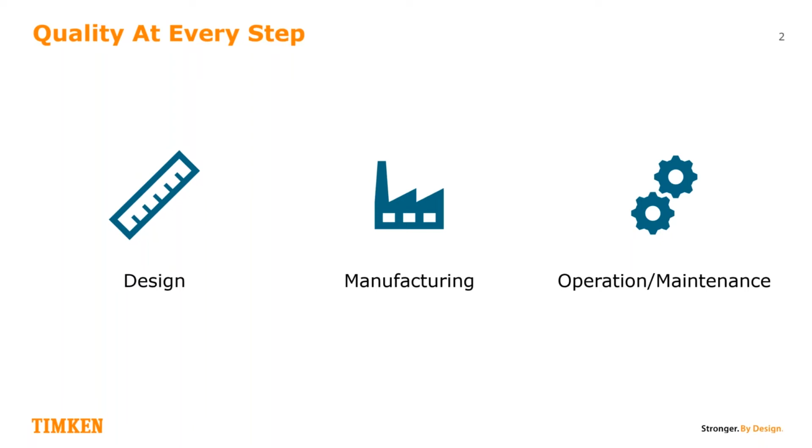Basically, gearboxes are designed to serve a function, and the ability of every component within the gearbox to perform its function is closely related to the lubrication that is provided to that gearbox. Frankly, a lot of the failure modes that we see are related back to the lubrication and issues with that lubrication.

Once we have issues with the oil and how it's provided and how it's able to cool and lubricate its components, if there's a degradation in that performance, that's when we actually have bearing and gear failures. So when we talk about the most common component failures, most of them have to do with lubricant, a lack of lubricant, a lack of flow, contamination, or somehow a degraded condition or incorrect lubricant.

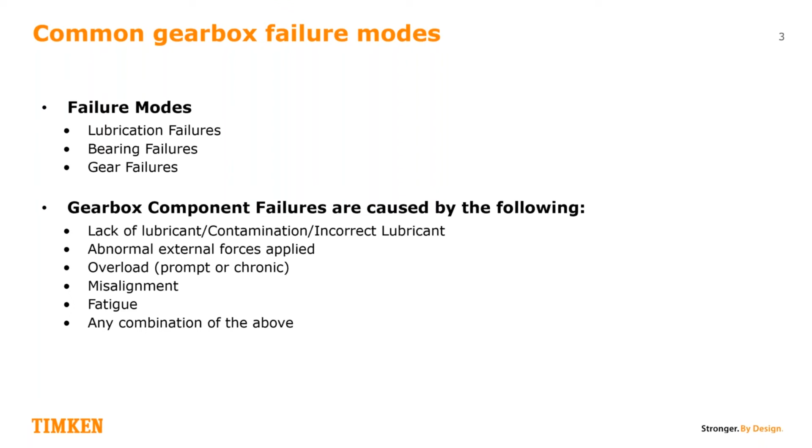Other factors that lead to gearbox failures are when we have abnormal or unanticipated forces applied to our gearbox. Also, you can see there are overloads, misalignments, fatigue failures, or combinations of the above. Now, there's a few things that we typically need to do before we go out and formally evaluate a gearbox. One thing is you need to know a little bit about what you're looking at.

One, understand the role that gearbox is playing, the service it provides to your process or application. We need to understand the speed requirement of the driven load and the speed of the prime mover, and how this gearbox is arranged, all its components, to translate the efficient operating speed of the prime mover down to or up to the efficient operating speed and power requirement of the driven load.

Another thing we need to do is look at the history of this gearbox. If it's a unit that's been in service for some period of time, we need to spend time evaluating previous evaluations and reports, and understand the maintenance that has occurred to the gearbox since it was last evaluated.

Oftentimes in these modern days, with changing requirements within our plants, we also have operational changes that affect our gearboxes, and we need to understand how changes like that may have affected our gearbox.

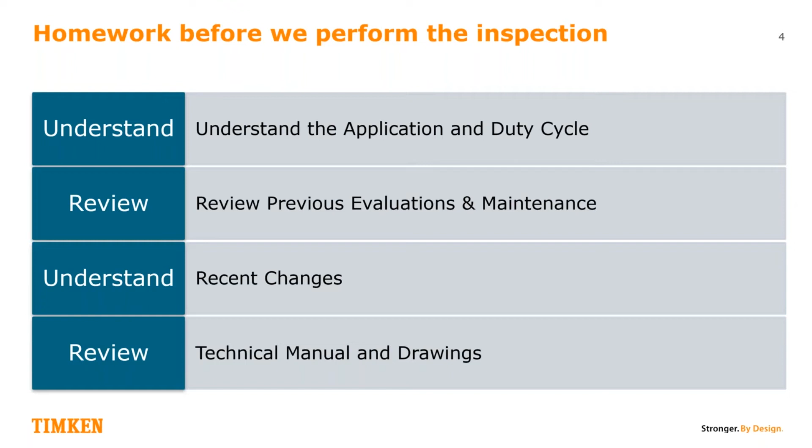There's a few concepts I like to keep in mind. I'm a big advocate for gearboxes. I've got the luxury of being motivated by technical correctness, and I have a fairly minimal concentration on the commercial aspects of the gear industry when I'm on site. I'm an advocate for the gearbox itself. You know how the Lorax speaks for the trees? Well, I speak for the gearboxes.

One concept that is absolutely vital, you can see it right here: cleanliness is next to gearliness. I don't think that's in the Bible, but maybe it ought to be.

It was commissioned, and the very next day I got a phone call from the owner operator of this thing, and they said, hey, guess what? The input shaft is turning, but the output is not rotating.

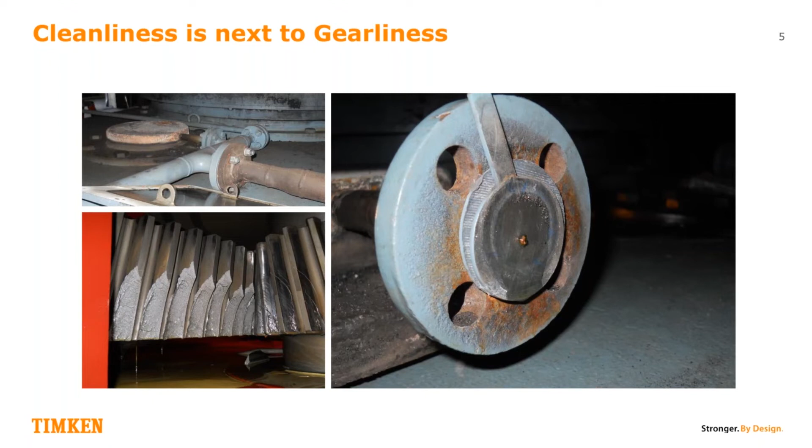There was a pebble that got into the system and got stuck in the orifice plate that supplies that top bearing. You can see in the bottom left picture, when that top bearing failed, the shaft fell out of proper alignment, and it was a cascading casualty. So that little pebble was about $250,000 worth of heartache, all because of insufficient practices regarding foreign material exclusion.

Here's another concept I like to think about and present: view every surface that you can when you're evaluating a gearbox. Tooth by tooth, as we say. We try to rotate and index these gearboxes so that, without major disassembly, through the inspection ports, we're able to view as many surfaces as possible.

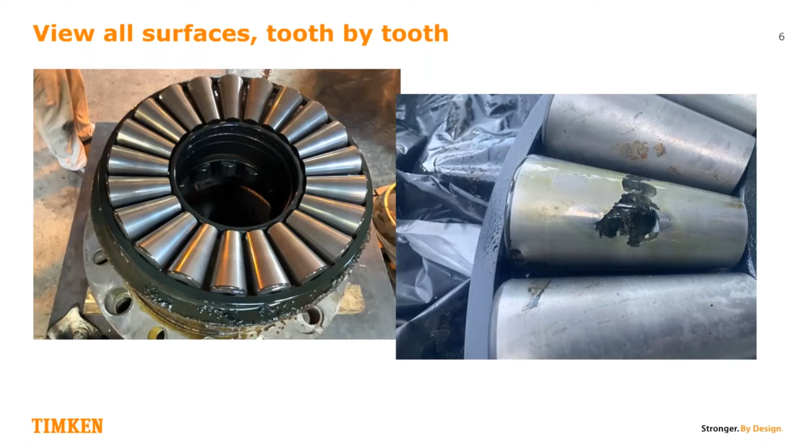So view all surfaces is another concept. Also, like that cleanliness one from before, find a way to do it clean. If you cannot make the surfaces and surrounding area clean enough to open and evaluate a gearbox, just don't do it. Wait until you've got an opportunity to safely evaluate a gearbox without introducing a big problem into the system. Once it's in the gearbox, it's hard to get out. But if you maintain that barrier and don't let debris into the gearbox, you won't have to deal with it.

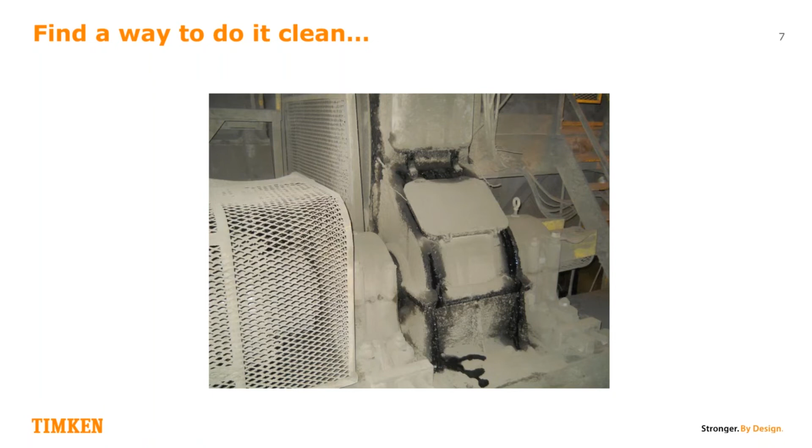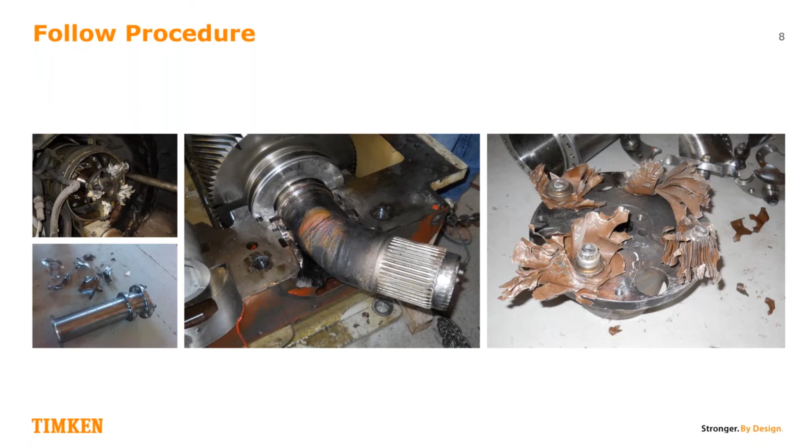Another concept: follow procedure. This is an example. We all see these subtle little failures and degrades on disc type couplings. This is a radical failure that occurred because of an assembly error that caused bolts to shear off, resulting in an imbalance and loose parts. At 10,000 RPM, a major imbalance resulted in this. That picture of the bent shaft in the middle used to have the hub on the right mounted on that shaft, and that thing ended up through the side of the building and out in the parking lot because of an issue with compliance to procedural steps as this was assembled.

Another concept: the Texas-sized blueprint. We've got a lot of guys on our team from Texas, nods to them, they're great gear guys. The concept is, if you've got multiple or redundant systems, you can rely on those as sources of information and feedback regarding one of the units. If it departs from the normal operating mode of the adjacent units, you've got a lot to compare. So don't overlook that capability. You can always go to an adjacent unit, make comparisons, and conduct some tests and experiments, not on the deranged unit, but on a perfectly operating unit. The concept carries forward. Don't overlook that as an asset in troubleshooting, maintaining, and evaluating.

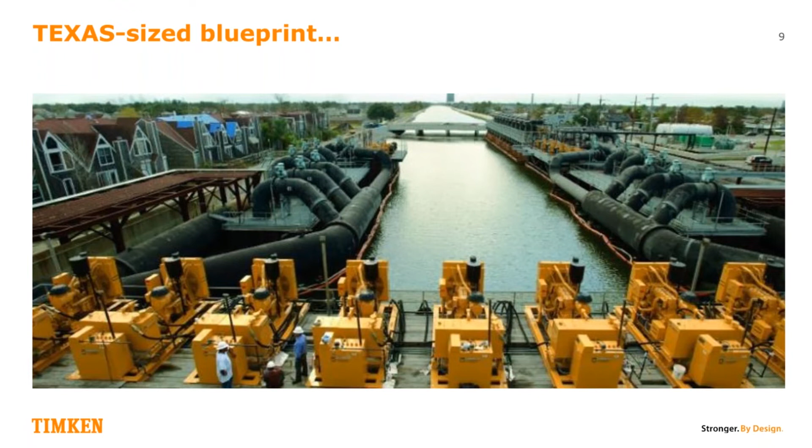When it comes to troubleshooting, this is the basic three-question sequence I go through when evaluating a condition. I do everything I can to understand the condition, and even though it may seem problematic, we have to examine: do we actually have a problem? If yes, we ask: was there ever a time when this was correct? If so, what has changed that led from a good condition to our now deranged condition? The same questions apply if you don't actually have a problem — you've got some visual indications, maybe several factors leading to some level of concern. You can carefully evaluate the system and those statuses, and maybe decide no, it's not really a problem, this is a normal anticipated departure, so we're okay.

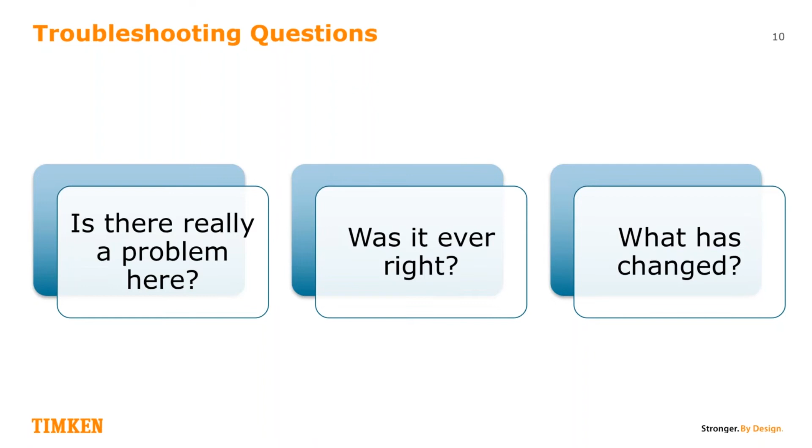The fact is, there are many factors that typically contribute to any problem we've got. That's good and bad. It's good because we don't have to correct everything — maybe we can simply guide a few of the problematic factors back into the green range and arrest the development of the problem. The bad part is once you've got a problem developing, you've got a lot of things to solve sometimes to actually correct it.

So let's think about going out to evaluate a gearbox. If you've got the opportunity, it's fantastic to evaluate the system during operation. When we have an operating unit, one thing I very much like to do is go out and take temperature and sound surveys. For temperature, take a non-contact thermometer, approach the unit safely avoiding any dangerous rotating equipment, and survey all of the available external surfaces on the gearbox housing. With this non-contact infrared thermometer, you can find all the regions that are hot and the regions with the highest temperatures, and do your best to understand why.

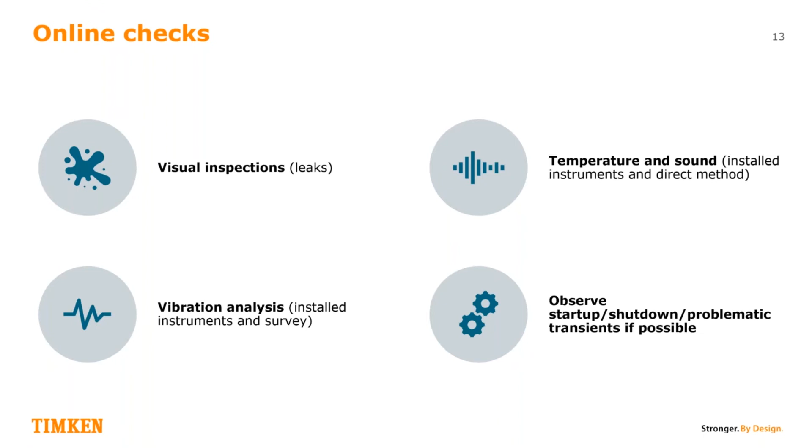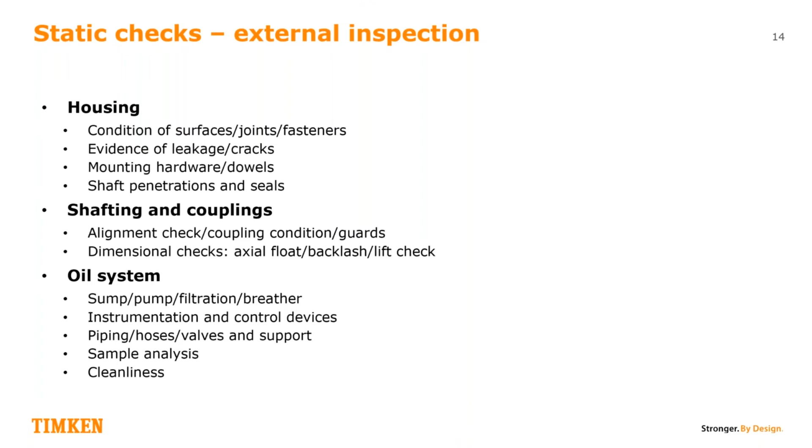Then we come down to offline checks. When the unit is static, everybody wants to simply crack it open and take a look at the gears. And I do think that's absolutely vital, but there are things that are often overlooked. In this particular case, if we look down to the oil system, that is one of the most problematic regions of these gearboxes that is neglected during evaluations. So the health and welfare of the pump, the filtration, the breathers, strainers, the coolers, all the different instruments that are associated with the oil system, these are things that require the same level of attention as the internal elements.

So these are the beginning of our static checks. Then we actually move to some static checks that evaluate the health of the gears and the bearings and the shafting and the housing. There's a few different dimensional checks you might be able to take, not always available, but when it is available, it's preferable to compare these values over time.

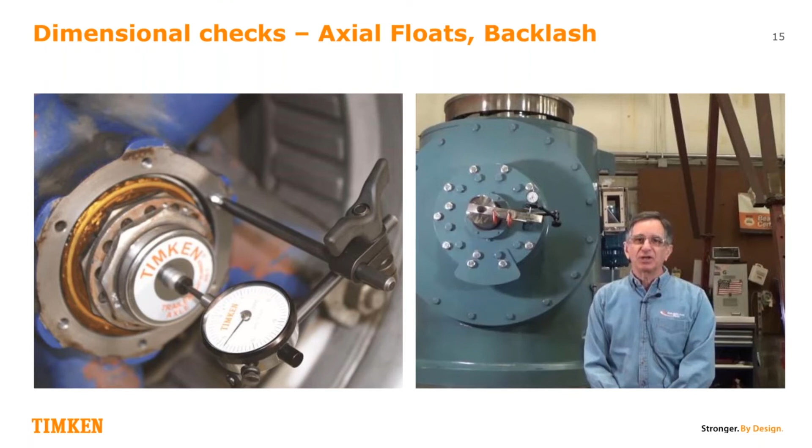Backlash is prescribed, and it is measured when the system is cold, because when it heats up, some of that's going to go away due to thermal growth. The backlash on many gearboxes cannot be adjusted, but the gearbox that's depicted here does have adjustability because it's a spiral bevel set, and that's one of the key factors in properly setting up the gear mesh, establishing proper backlash.

Now, other static checks. We need to open this thing up and take a look at the condition internally. You're going to see that some of these photos in the examples are sort of worst case scenarios, or at least examples of very bad conditions. Most of these photos in the presentation are things that I've personally taken.

That photo on the left, that's on a feed pump in a nuclear plant. So don't feel like some people are above having these issues. This was a condition that was a big surprise. This box had been opened and actually rebuilt two years prior, and suddenly this condition was found. It was the result of a lot of intrusion of moisture into this housing.

Repeated heat up and cool down cycles allowed that moisture to be drawn in. That inspection cover on the right side, that's a marine application on a Navy ship, and they actually had a chloride intrusion into the oil system, and there was massive rust throughout that system. But evaluating those internal surfaces, be it the housing, shafting, available bearing surfaces, we want to take a look at those conditions, note them, and decide if we need to take action based on our findings.

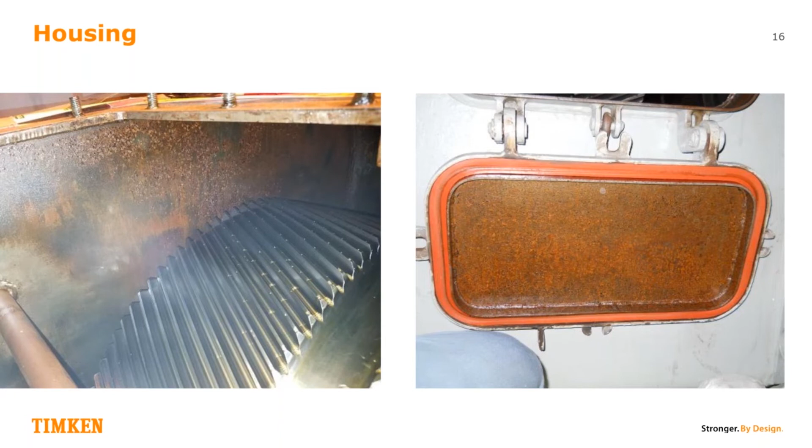Another thing that's vital to do when you've got a gearbox that's idle, it may not be opened up and drained. So there may be oil resident in a sump down below, but what you can do is get a magnet and drag it along the bottom of that sump, and you'll be surprised what you find sometimes. Anything that's ferromagnetic is going to pick up.

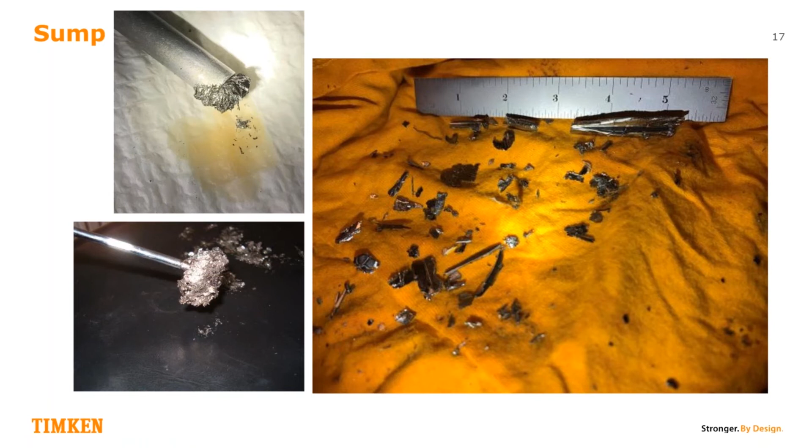Examples on the left are kind of common, small pieces of debris that have been lost off of gearing. On the right, this was after a tooth failure recently in a hydroelectric plant. Just a simple drag through, I found a big component section of a tooth, and that ended up having to be taken out of the system and rebuilt because it was a planetary arrangement, and once you have a gear failure, they tend to just spread all throughout the entire system. So finding this allowed us to take the unit out of operation and avoid cataclysmic failure of the unit.

So let's talk about what we want to see when we actually look at the gears themselves. When the gears are in mesh together, they ought to establish a pattern, an area where the work is being done between the driving tooth and the driven tooth.

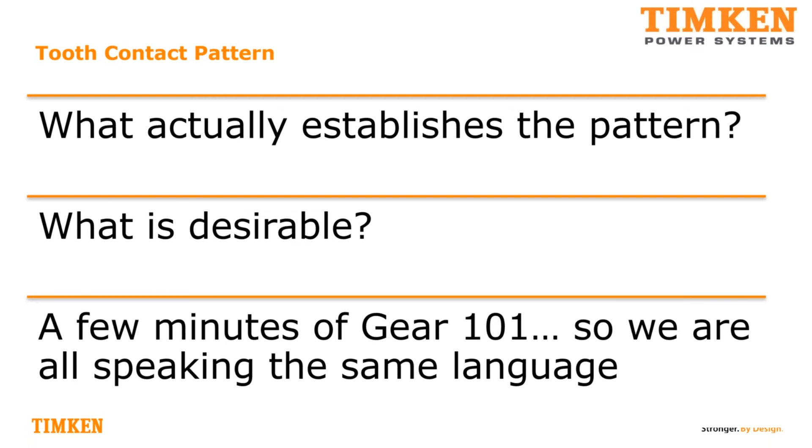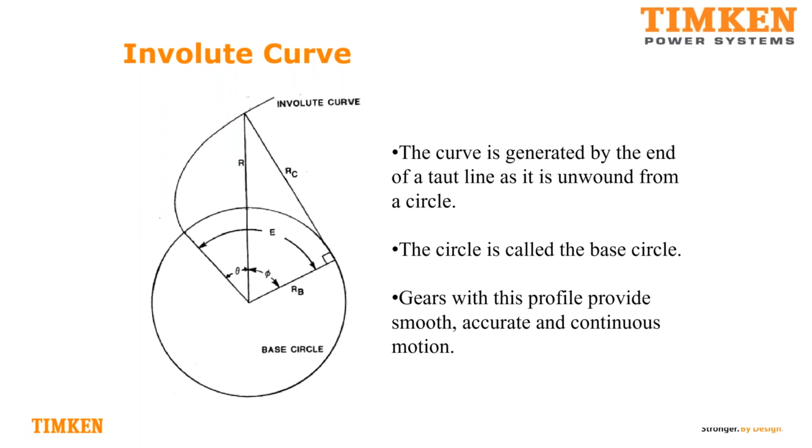And we're going to talk about how that is formed and what we want to see. In order to do that, we're going to talk about the shape of the tooth. These modern gearboxes, very often you'll find that an involute curve is used as the tooth form. That is the shape that's formed. You can see how this taut line is unwound from a circle, unwound from the right and from the left, and that forms the two sides of that tooth. That geometry is depicted here. We'll call that the involute form, that curve that is actually formed that shapes the tooth.

There's a few terms we can look at here. The addendum is the top half of that tooth. The dedendum is the bottom half of that tooth, and the pitch diameter that you'll see about mid-range on the height of the tooth is key to what we're going to talk about next. So there's this line across the flank of the tooth at that pitch diameter. We'll call that the pitch line.

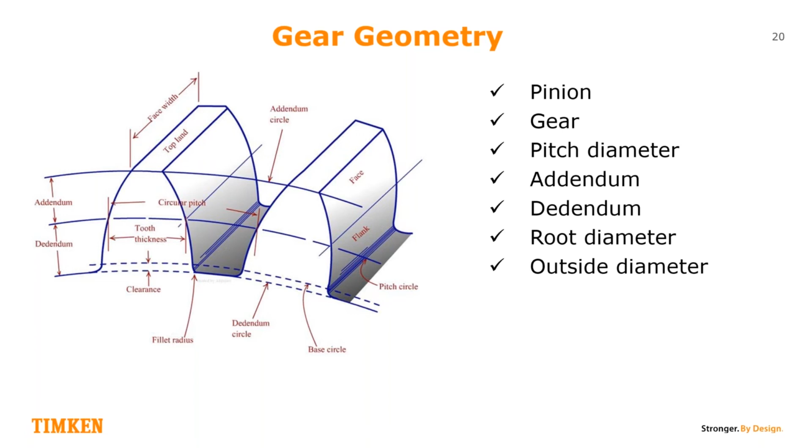When these teeth that have the involute form are in mesh, we get continuous, constant velocity action, transmitting power. You can see that the gear on the left is the driving element. As that comes into mesh with the driven tooth, it starts to have contact low in the dedendum of that driving tooth. That little blue line, with the black dot in the middle, represents where the actual contact and power transmission is occurring.

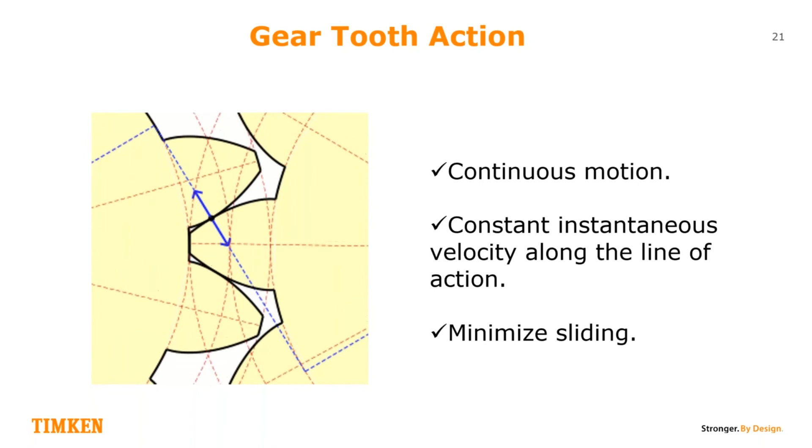It slides into mesh, and when it gets to the middle of that transition between the two, it's at that pitch diameter we mentioned before. So we slide into mesh, and the friction between the two elements changes from sliding into rolling when it passes through that pitch diameter, and then it slides back out of mesh. This is the involute meshing action. We want to minimize the sliding friction and maximize that rolling friction, because a lot of the power is transmitted at that rolling friction time frame of the mesh, right there at the pitch line and the pitch circle.

We talk about the power ratings of gears in terms of two factors: strength and durability. Durability is the resistance to wear, the resistance of that tooth to experience wear, and the strength is the resistance of the tooth to bending stresses that could cause fracture and breakage of the tooth. Most designs actually prefer we experience wear before we experience breakage. These are incredibly complex engineering calculations that go into determining these things.

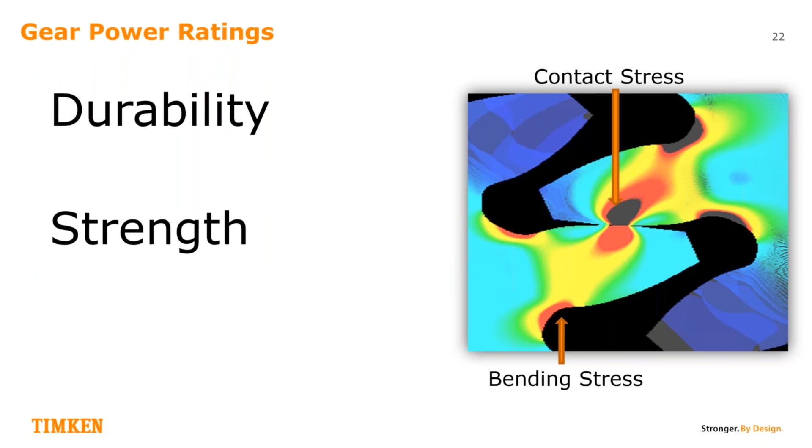There's like 18 factors for durability that are calculated in. But the fact is, those designs are based on trying to avoid breakage and wear.

Now let's talk a little bit more about tooth geometry. We expect to have the maximum amount of the tooth doing work as it goes through mesh and transmits power. We want the entire length of that tooth to perform work, but it's problematic to have a lot of forces applied to the tooth very near the ends or very near the tip of the tooth. So we actually modify the geometry of the tooth, taking it away from that perfect involute form.

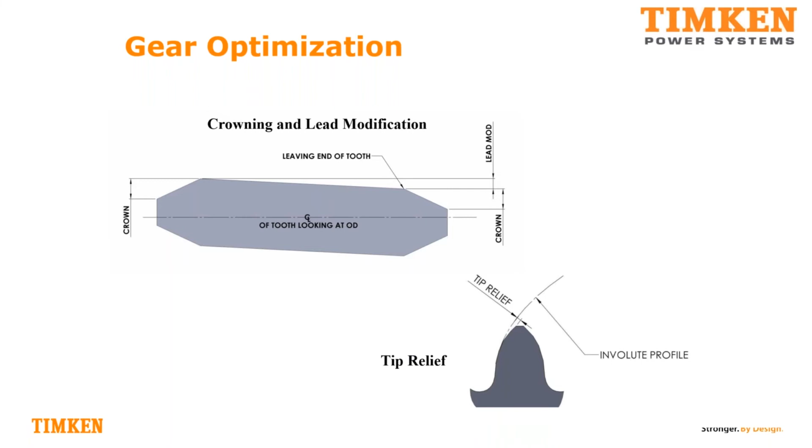You can see crowning. That's the term we use for the amount of material we remove from the ends of those flanks to take the full geometry out of place, so we don't have a lot of force generated at those extreme ends. Also down below, you'll see that we remove material to back away from that involute curve, so we don't have a lot of force applied or transmitted at the tip of the tooth. It reduces breakage and wear, and it also reduces noise and vibration generated within the gear mesh.

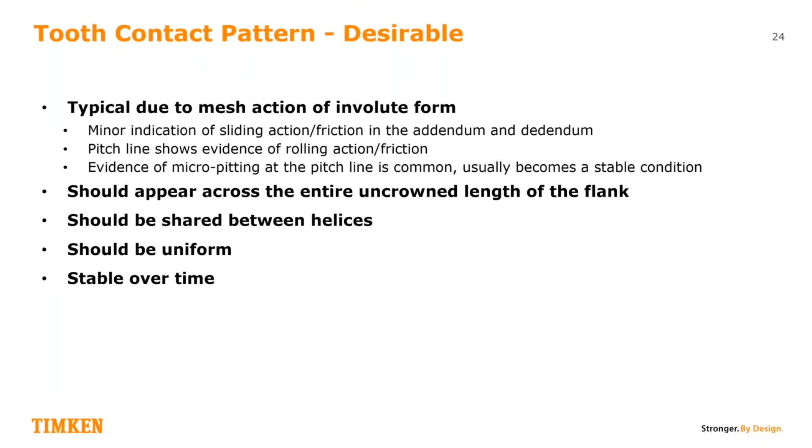So the contact pattern shows how we're doing the work. We want to maximize the amount of the tooth that's doing the work, and this is what we typically want to see. There should be some indication, high and low on the tooth, of sliding friction, and the pitch line should show some evidence of rolling friction. That contact should appear across the entire uncrowned length of the flank, and it should be shared. If it's a double helical gear, we should share that uniformly between each helix.

Now, on a brand new set of gears, it's going to be very difficult to see a wear pattern. This is a set that I put in 2013, and I've looked at it every 2 years since then, and you can barely tell that it's operated.

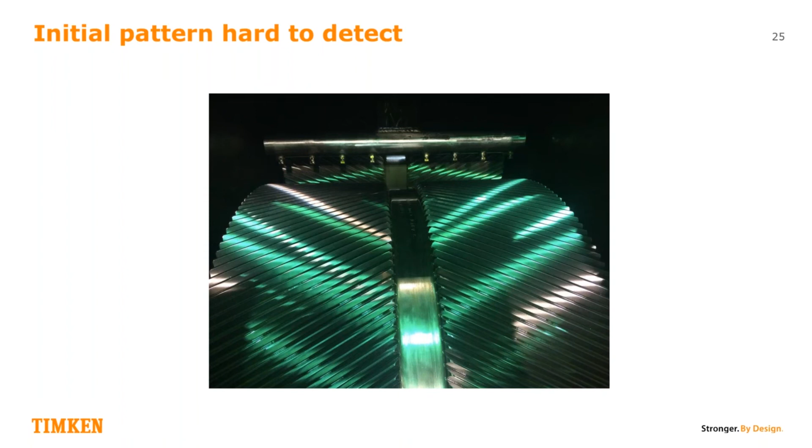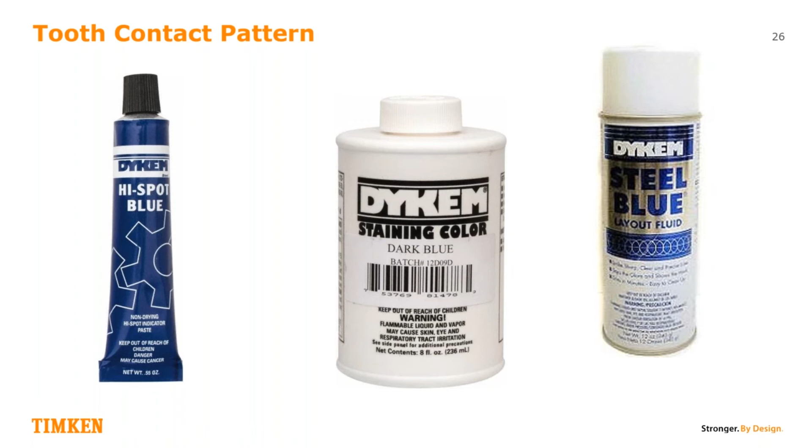So one thing we can do is actually do an unloaded contact check by applying this element on the left, this Dykem Hi-Spot Blue. It's not a Dykem commercial, but they make a good product with lots of pigment in the carrier fluid. We apply that to our gear, and we apply some contrasting agent perhaps to the opposite gear that's driving, and then we run these elements through mesh, and we'll see transmission of bluing in the region that's in contact and doing work. And these are some examples of that unloaded bluing contact check that you can do.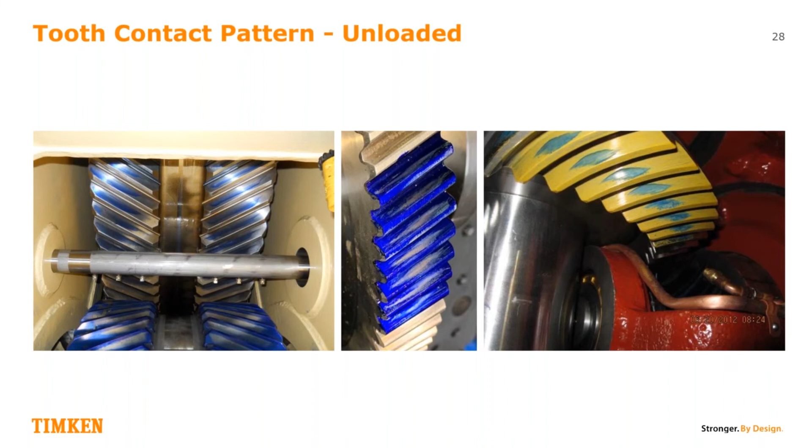And on the right, that's a spiral bevel gear. So the contact pattern we'd expect to see is different, and frankly, it's idealized. This is a very good contact for a spiral bevel gear. Now, you'll see that unloaded contact is not ideal because it didn't go across the entire geometry of that tooth. Only loaded contact will actually do that because the tooth tends to deflect and come into more full contact with its mate.

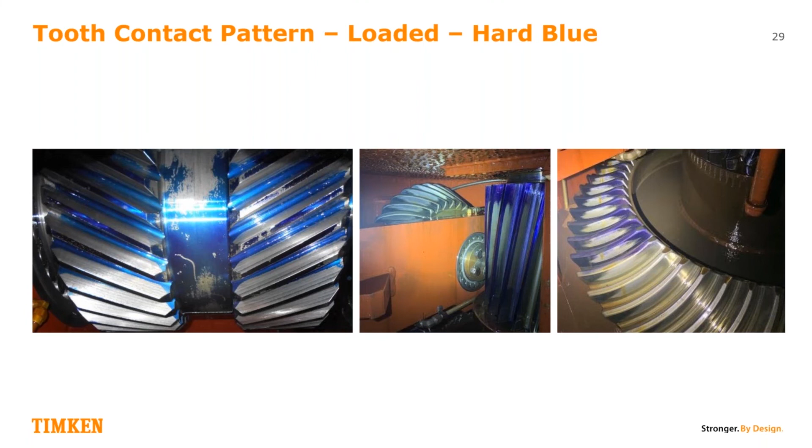So what we do is we apply those hard blue compounds a couple of slides back. There's an aerosol or a paint on, and that hard blue is applied and allowed to dry, and then we operate the gearbox at full operating capacity and torque. And then when we shut it down next time, the area where that blue has been removed, well, that's our contact area. And you can see these are examples of good contact area that's being depicted. This is hard bluing, loaded contact. So that's another way we can evaluate it, even on a brand new gear set that really won't show us much.

So there's a time frame when we've moved away from brand new gearing and we're starting to see some indications. So what are some abnormal things we're going to see? We're going to see evidence of abrasive wear, and we're going to see evidence of surface contact that is problematic.

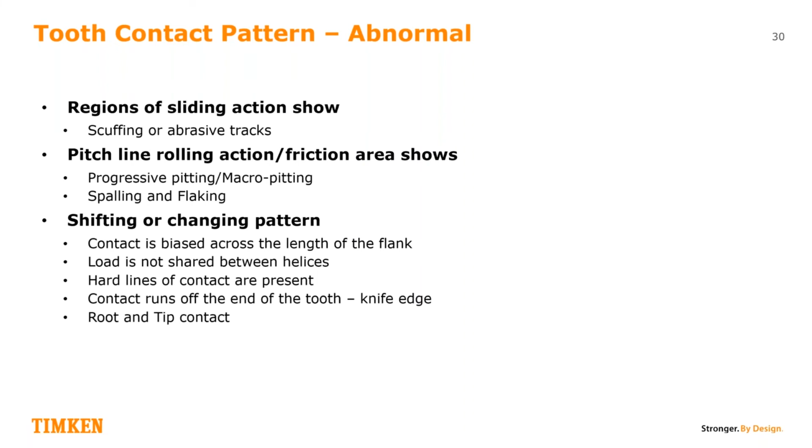One thing we do get, because of that rolling friction at that pitch line, tiny geometries stand proud from the profile of these teeth, little asperities, and the oil film is very thin at this point between gears as they mesh. We're talking tenths of thousandths in some cases, especially at the pitch line. When that compressive rolling force occurs, we will get breakages of any tiny proud geometries, and the little high spots will break away and they'll be flushed out in the lubricant.

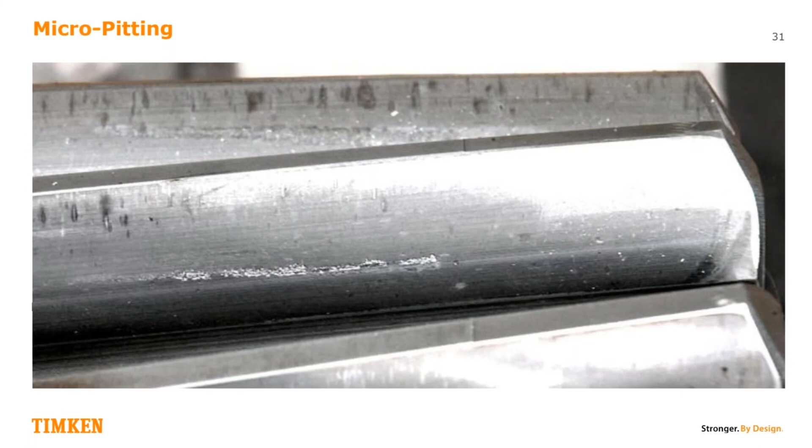And the remaining fractures down below is called micro pitting. Typically, this does occur. It's expected at the pitch line. You'll oftentimes get a certain amount of micro pitting. Here's another example of very small pits, micro pits that have occurred - the little white dots that you'll see on this tooth. You'll see there's a couple of larger pits, but for the most part, this is a very stable condition with just a little bit of micro pitting.

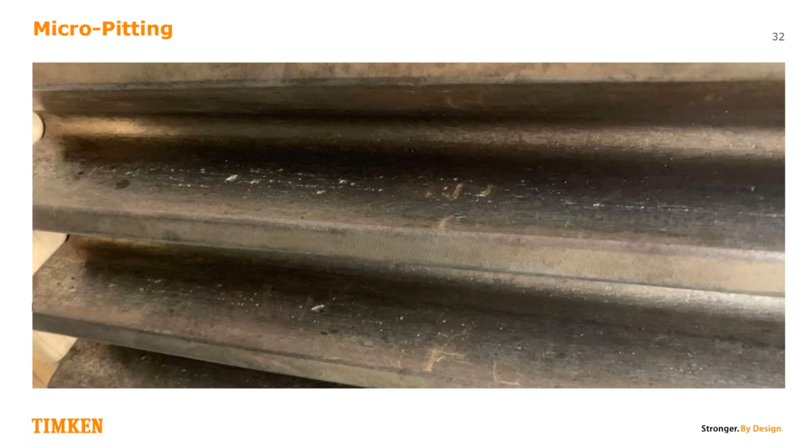Sometimes the micro pits will form a region around that pitch line. You're starting to see that on the right side of these flanks. Why is it not all the way across the pitch line? In this case, load must be concentrated in this region. Could be due to just a little misalignment between the geared elements, could be due to some twisting deformation that's occurred that allows this area to be slightly more heavily loaded, and that very thin film allows this micro pitting to occur.

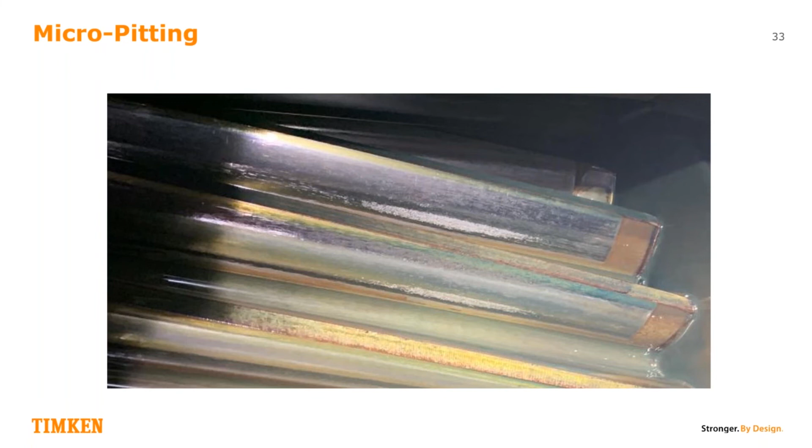Here's another example where we can see an entire region at the pitch line, this band of micro pitting that goes all the way across these teeth. This is very uniform. I've looked at this gearbox many times, first time in 2004. And there's a couple of things happening here.

Above the pitch line, you'll see that very polished region. That's some abrasive wear that's occurring in the addendum above that region. And on to the right side, just above the region of micropitting, you start to see an increase in the number and severity of larger pits.

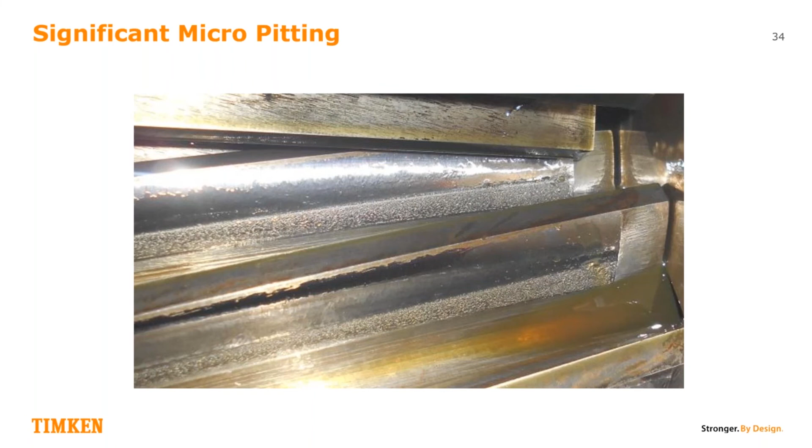Pits will join up and form larger pits if they continue to have regions that will come into contact through that very thin oil film. Now, this has been a pretty stable gearbox, and I haven't had this level of concern, but it's been many years, and it's very stable in this condition.

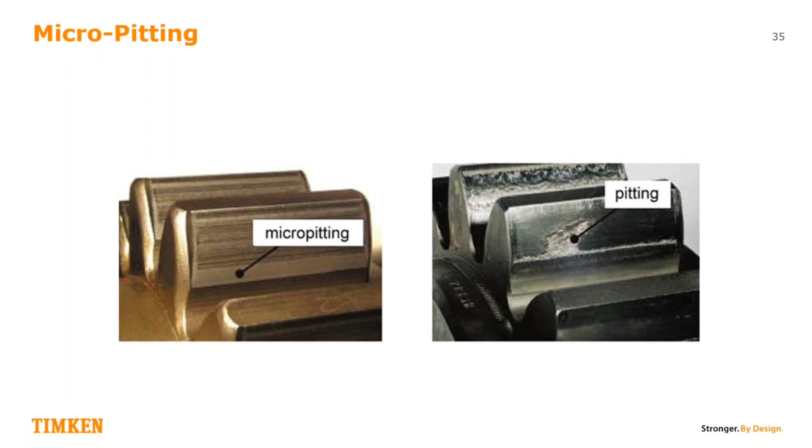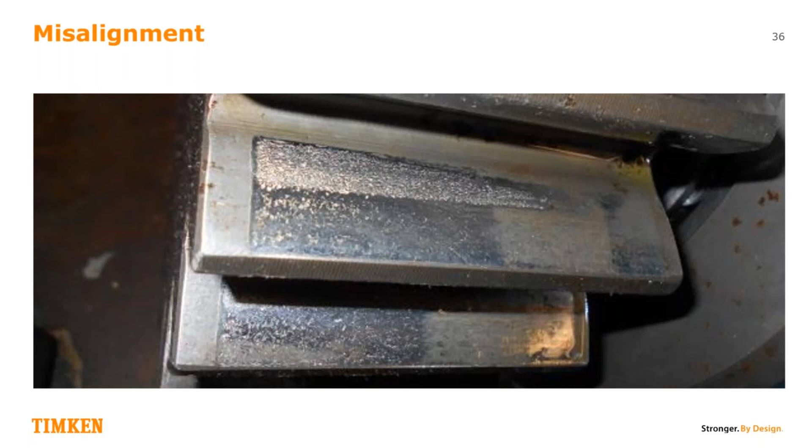Here's an example of when micropitting has only really occurred after there was a failure of a bearing on the other end of this particular cartridge that held this pinion in place. Because it has that misalignment, you see this abnormal wear pattern where that micropitting is developed. Classic sign of misalignment. The pinion had to be replaced after we corrected the misalignment in this particular case.

Pitting. These pits can continue and join up with adjacent pits, and then it becomes macro pitting, and eventually spalling, another term we use for pitting that's essentially out of control and very problematic. These are elements that have essentially failed, and we really need to work toward a replacement at this point.

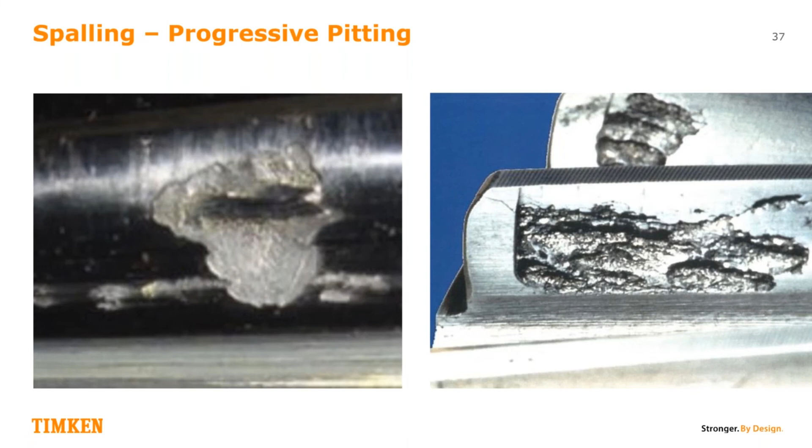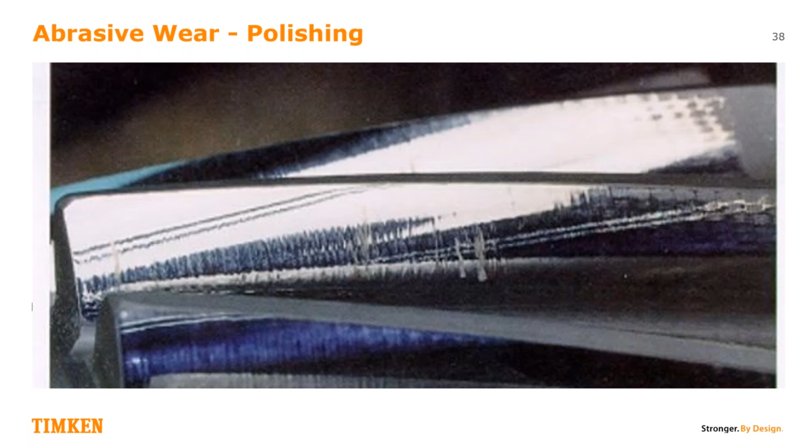The tooth and the tooth that it meshes with are not actually coming into contact, but the very thin film of oil between them is filled with abrasive particles that are essentially making tiny grooves and removing geometry off of this tooth. It's happening here and it looks very nice, but it's problematic. It's also occurring in every other surface within the gearbox that's served by that oil, including the bearings, and that's problematic. So that's abrasive wear in the form of polishing.

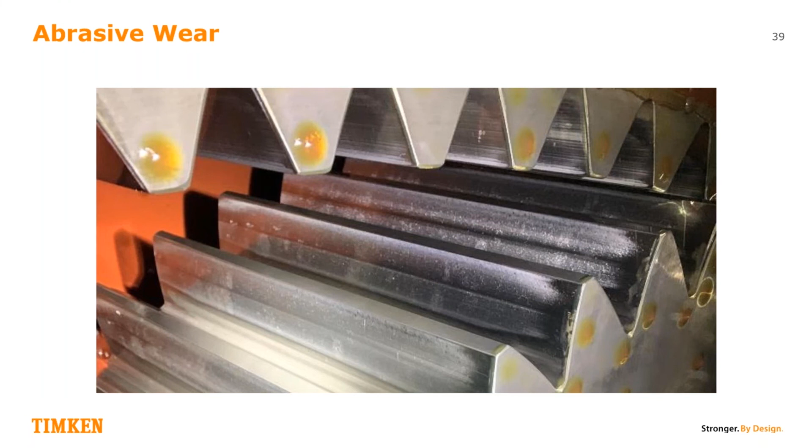This is another example of abrasive wear. You can see on the teeth on that bottom element, the dark line across the middle, right at the pitch line, sort of mid-height on that tooth, that represents the area of rolling friction. And we're not suffering a lot of pitting here, but above and below where the sliding friction occurs, because there's a lot of suspended particles in that oil, you're getting that region of abrasive wear.

Now, here's an example of what we call adhesive wear. This is not three-element abrasion. This is actually two-element abrasion where the gears themselves are coming into contact. The oil film is very thin for some reason. Typically, the oil film is thin because we've had a breakdown in the oil quality, or sometimes it's because we've got mechanical overload of the system.

For whatever reason, the high spots on these meshing elements are actually coming in contact with the adjacent tooth. It gets to when it makes contact, it actually has a little microscopic welding event that occurs, and then it instantaneously breaks free. That's why we see all this massive loss of profile and geometry. This is not a situation that is correct, or rather that you can live with. This is something that needs to be corrected pretty darn soon.

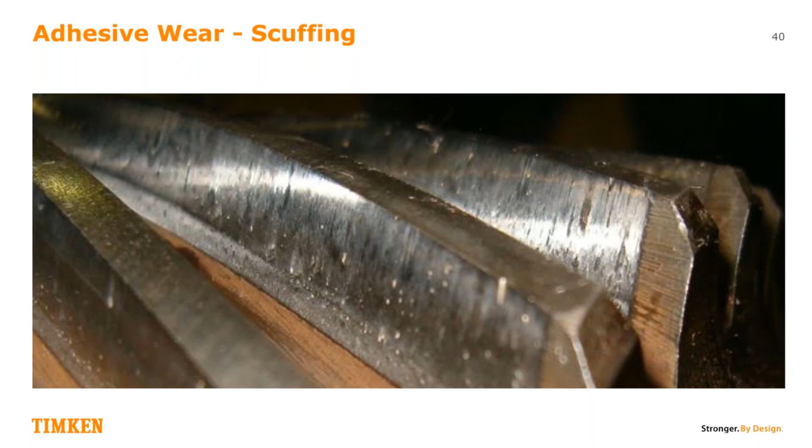Oftentimes, this is just something you track until it becomes necessary to change out the gear set. You track the progress of that over time, and you make part of your long-term planning changing out a gear set. This is where it's become very extreme.

We've lost profile and we've got plastic flow because we're just in hard contact with the adjacent tooth. This is a gear that needs to be replaced.

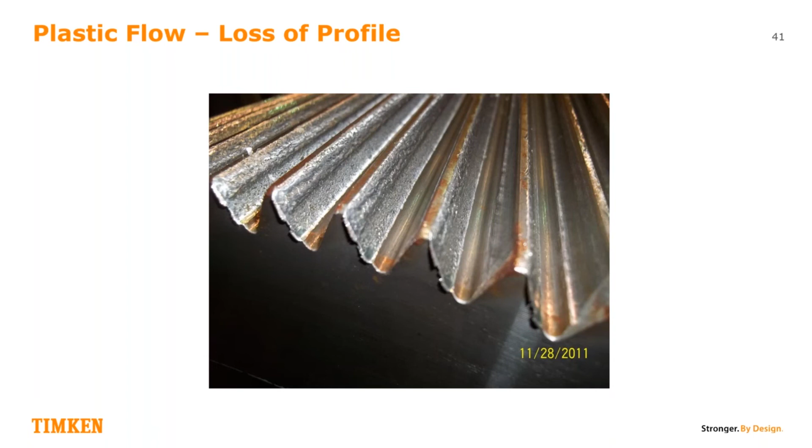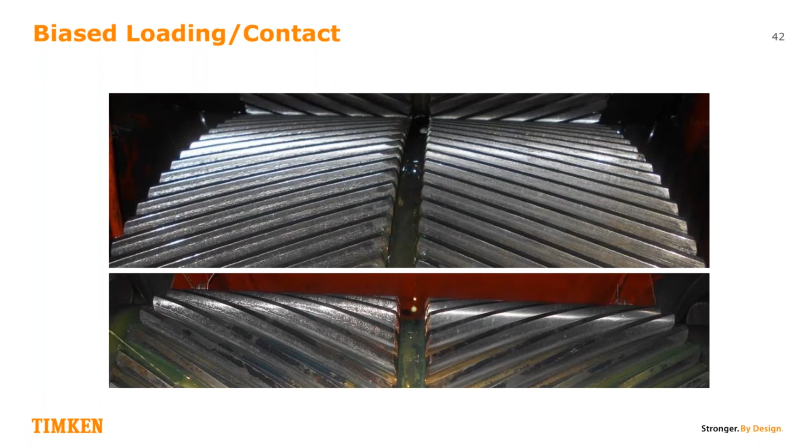Well, one of these elements should be allowed to float axially so that it can simply follow the other and always be in correct mesh. In this particular instance, the bearings were set up incorrectly, and rather than be allowed to float freely axially, both of these gear elements were held axially, and they couldn't grow and move the way they should have. This ended up costing a gear set replacement, and we had to reevaluate how the gearbox was set up. And we had to make some changes, but now it's a very healthy gearbox.

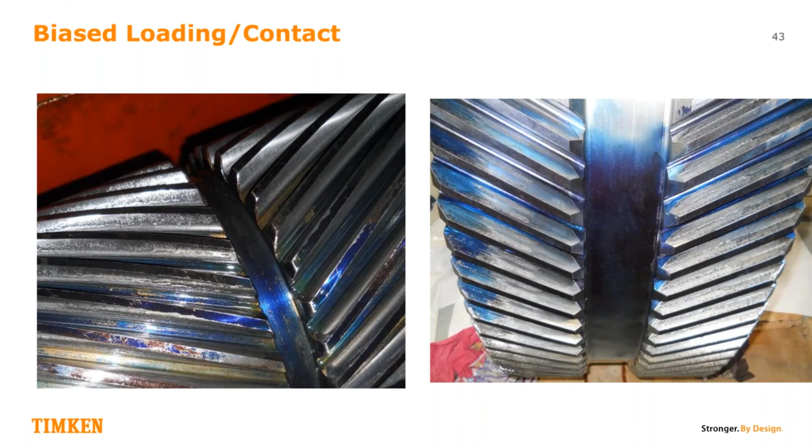These are just some more examples. You see that picture on the left, same kind of thing happened as on the previous photo. One flank is heavily loaded and the other flank is essentially untouched. Again, that was a bad assembly, incorrect assembly that didn't allow axial floating. It's a very similar situation on the right-hand side.

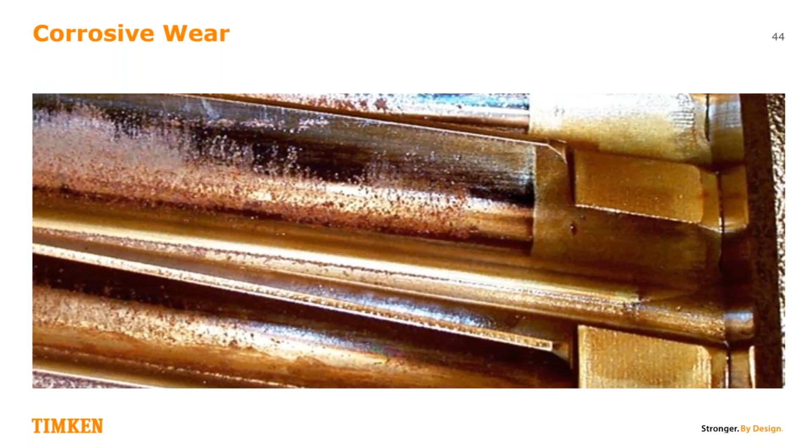Another very common problem with gearboxes is corrosive wear. This is the development of corrosion that occurred. We think this one was actually chemically related, where an incorrect additive was put in the oil, and this corrosion just flared up all throughout the gearbox.

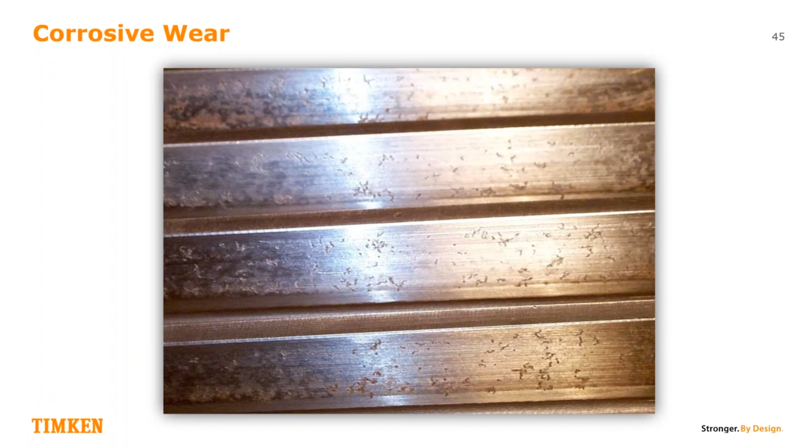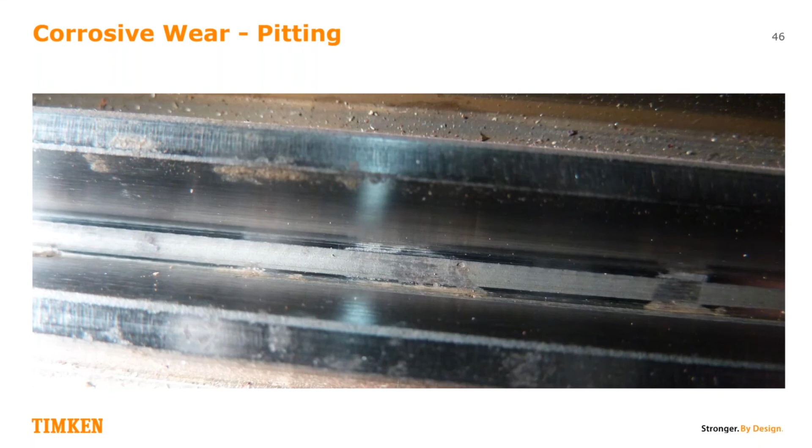This is another type of corrosive wear, corrosive etching, that you'll find sometimes. Sometimes these are not too progressive. This was due to long-term storage with no preservation. This is another corrosive wear situation where pits have developed. Again, this was a gearbox that was idle for a great length of time. It had to be hand dressed before it could be placed back into operation, and it's still gonna suffer premature death because it just didn't have proper layup and preservation when it was idle.

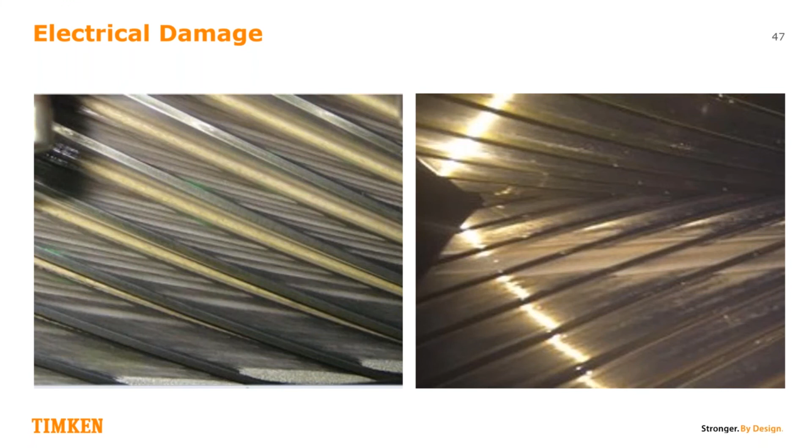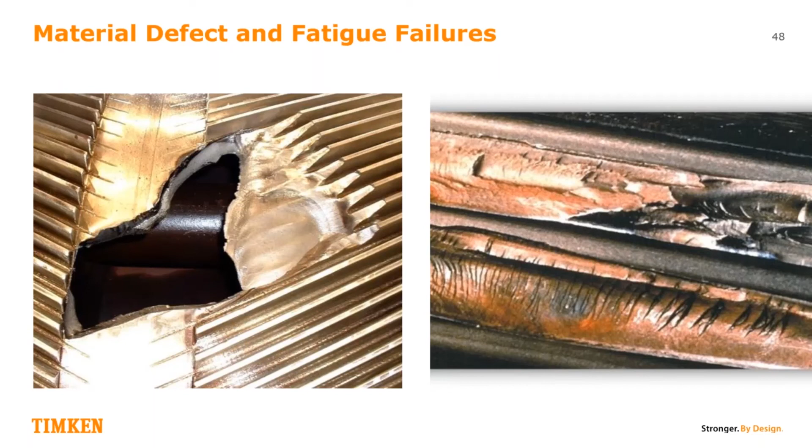So once we've got our data, our temperatures, our photos, our condition, our vibration data, we want to try to effectively use that to plan the future. We need to look and compare our current status to our previous status. We want to look for negative trends. And it's good to note all departures from the ideal state. Even if you think something's not important, but you've noticed it, well, you know, we had some contaminant here, we had some degraded oil pressures and flows here. Mark that down and note that in the report so that it can be incorporated into our evaluation.

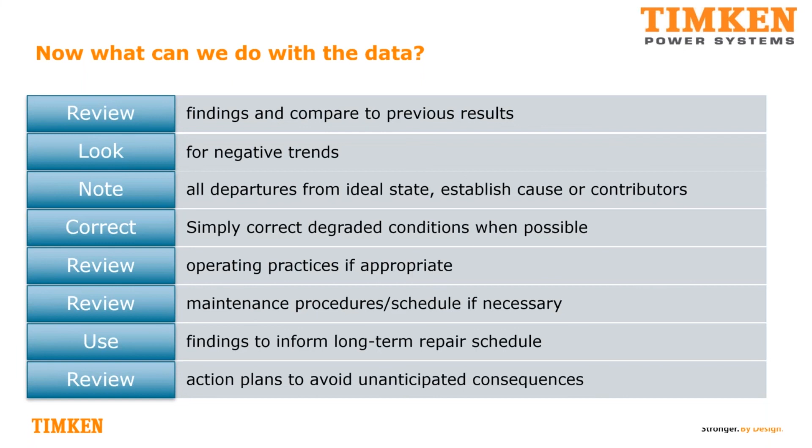The important thing is we make corrections to the very simple things that are easy to correct. And then we look at what have we been doing that has contributed to these conditions. We review how we operate and maintain, and we inform our long-term planning based on these findings. Another thing is to not base it only on our findings, but to carefully review action plans. If you're going to make a change to a system, really try to run it to ground. What are the potential downsides to avoid the law of unintended consequences?

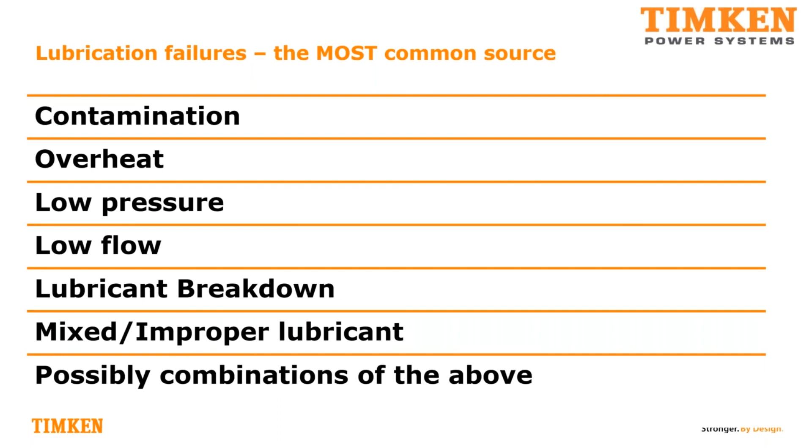Like I said before, most failures actually have their root in a lack of lubrication. Something has caused these oil films to degrade or not be present, or not have enough flow to cool and lubricate the components that they're supposed to serve. Other failure modes we've talked about a little bit, but abnormal forces and conditions, well, when we're out of alignment, that's a big warning. These are various issues that can place us in a situation where the gear teeth are overloaded or the oil film is not present to the extent it should be.

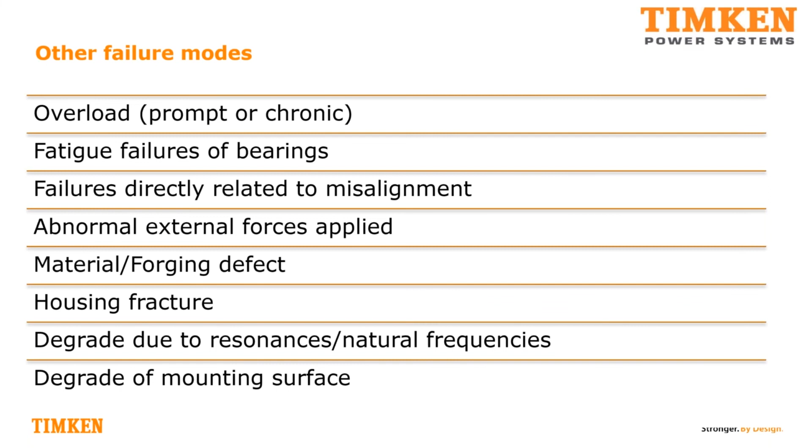When we get down to the bottom line, root cause often has to do with us. We've introduced foreign material into the box, or we have incorrectly operated the gearbox, or we did our best, but the technical guidance given to us was incorrect. Maybe we renewed a bearing set but weren't given the correct bearing clearances, and we put them too tight or too loose, and that caused a failure.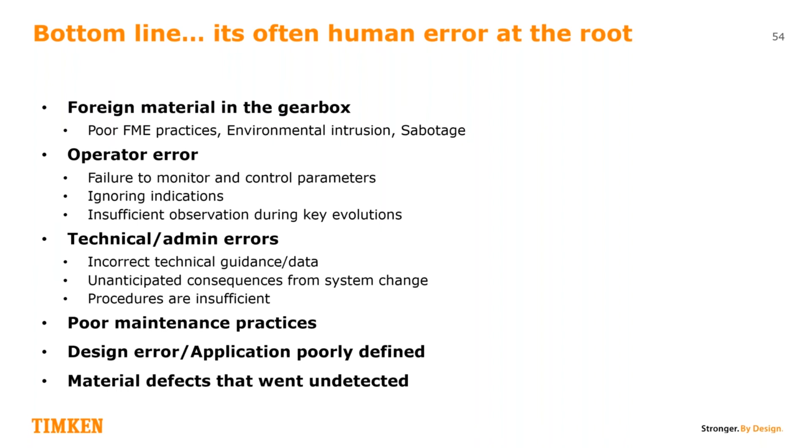So that's basically the root of evil that we have to fight against out here in the gear game. When do we take action? Well, just very briefly, when our visual inspections show that there's a major shift or degrade in the contact.

Also, when we pick up a lot of metallic debris in the sump—you saw it on those magnets—that's just a huge warning sign. We need to take immediate action.

Now the vibration: if you've got good quality vibration data and you trend it over time, looking at data sets collected periodically, you can do a waterfall trending diagram. You can usually see increases in amplitude in problematic frequencies or establishment of fault frequencies from bearings. Those are a clear indication that we need to take action.

Also, our oil analysis—we didn't really talk about that a lot, but it's absolutely vital that our analysis of oil occurs regularly and that we act on degraded systems or situations that we find.

Anytime we have a major event that overloads the mechanical system, whether it be the driver or the driven load, consider how that may have been transmitted back via the couplings into the gearbox, and make extra inspections and examinations based on that, so that we don't have failures or damage that's occurred and just not notice it.

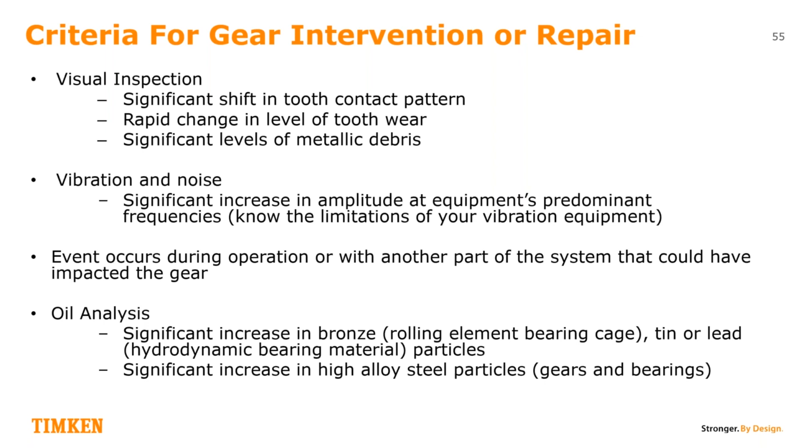So at this point, I know that was just super quick, but it's an interesting topic to me. I love gears. I'll tell you what, Philadelphia Gear's been in the gear industry since 1892.

I know you see Timken on the slides here. Timken actually purchased Philadelphia Gear about 10 years ago, and Timken Power Systems owns a lot of different companies within the power generation and transmission field. So they wanted to have an excellent gear company, and they acquired Philadelphia Gear.